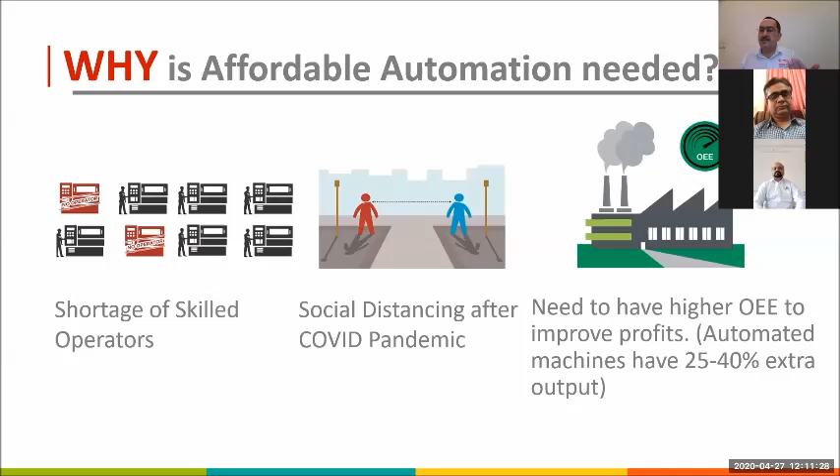Third thing, we have all suffered losses. All this shutdown, and when it opens also partial shutdown, huge loss. From where will we recover the loss? One of the ways of recovering this loss is by having a much higher utilization of the machines, which we call OEE, through automation. So if we implement this today, we start the process today, we will quickly recover our losses, and then we will make our companies strong so that we have higher profits generated over the medium term, long term. So because of these three reasons, affordable automation is absolutely the first priority today.

Now, when we talk about affordable automation without robots, what is the magic mantra? Actually, there is no magic. It is dependent on two basic principles. First principle is to design the in-feed system. In-feed means how the material comes to the machine. Design the in-feed system in such a manner that you do not need expensive equipment for that. So we rely on two things, gravity and vibrations. Wherever possible, use gravity. From a higher height to a lower height, gravity will bring the material. And use vibrations. I will explain now how we actually do it. So this is one principle.

Second is to design the CNC machine in such a manner that its own systems and its moving assemblies unload and load the machine without need for any gantry or robot. So these are two principles I will focus on today, material movement through gravity or vibration, and machine designed to load and unload itself, so you don't need any external systems. So, first principle.

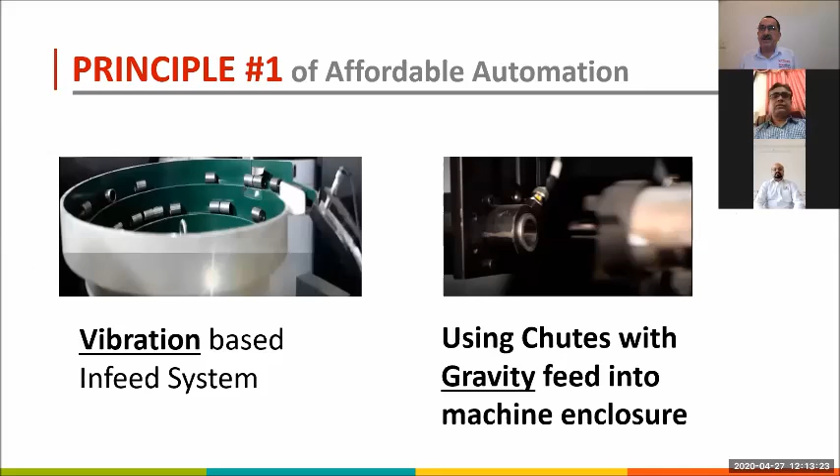In-feed. As you can see on the left side of the screen, this is a very cheap and very widely used system called a vibratory bowl feeder. This is a vibration-based system for small parts. You dump the material inside that, and with the help of vibration, it slowly moves the material to a chute from which it can enter. The second method is to design chutes, like a Z-shaped chute, where through gravity the parts keep coming down and then enter into the machine. So these are two of the common ways in which gravity or vibration is used for feeding the machine.

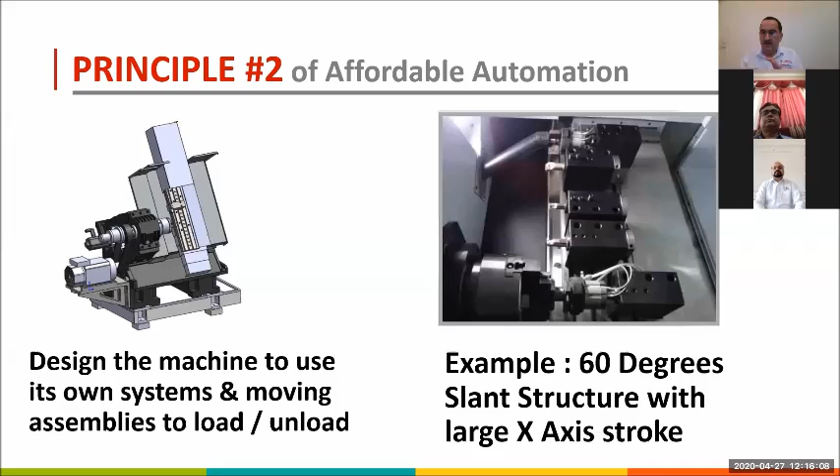So the format of this webinar is that we will show you something, explain certain concepts, and then show you a small clip which will visually demonstrate that. Here we will illustrate this principle of the machine loading itself with something called twin grip, twin release.

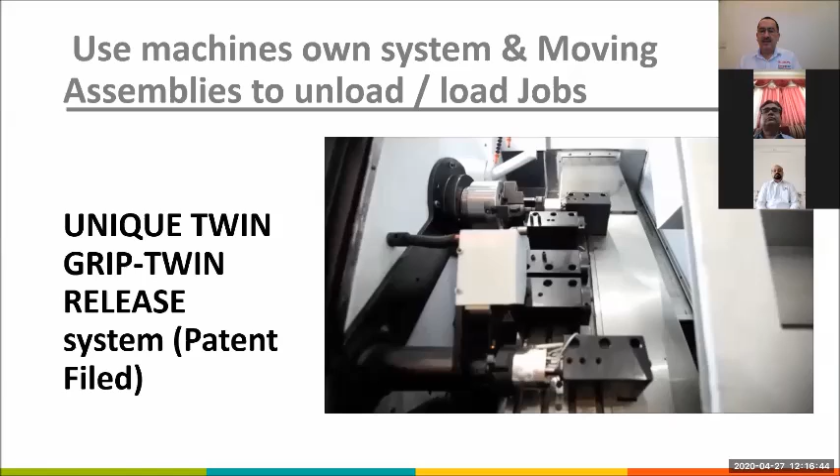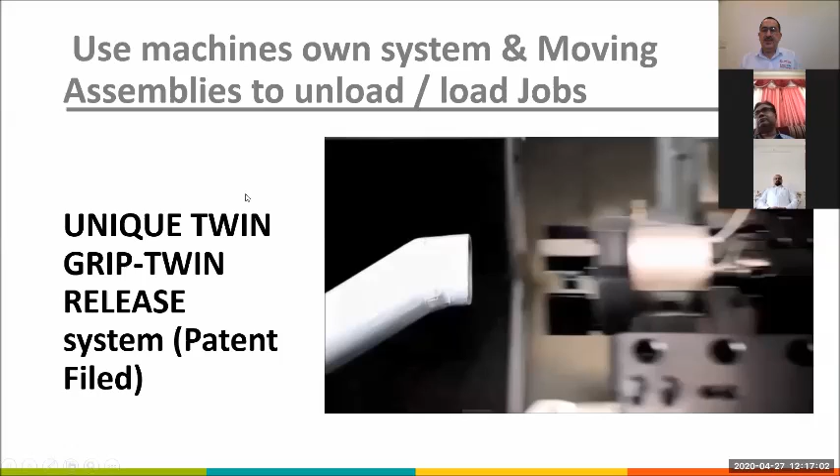So one gripper grips the fresh job, the other takes the machined job. I'll repeat this because this was very fast. The gripper which picks up the fresh job loads it into the work holding, and the one which has removed the job throws it into a chute. So, a very simple CNC-controlled mechanism mounted on the CNC machine itself. This is an example of using the machine's own structure and assemblies to load and unload.

Now, typically, these types of automations are for machines where you have two operations, operation 10 and operation 20, or at least one operation, operation 10. Now, once you have done the first operation, there are three possibilities. The first is that you exit the part through the chute, as we have shown here. And we saw in the previous video, the part is exited from the machine. Its job is over. But we have two other possibilities.

The second possibility is, in case of certain jobs where the second operation requires the face of the job to be turned. अगर पहले यहाँ पे मशीनिंग थी, पकड़ना यहीं से है, पहले यहाँ मशीनिंग थी, तो उसके बाद यहाँ करनी है. For that, we have a very simple technology called flip or flipping system, which I will show just now.

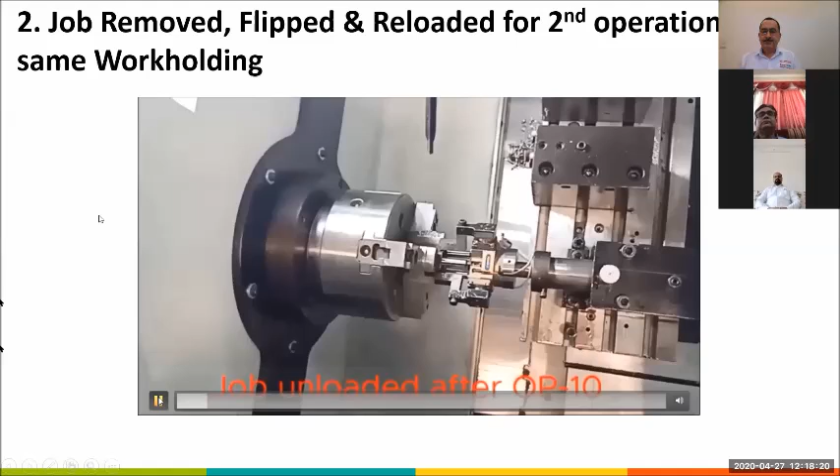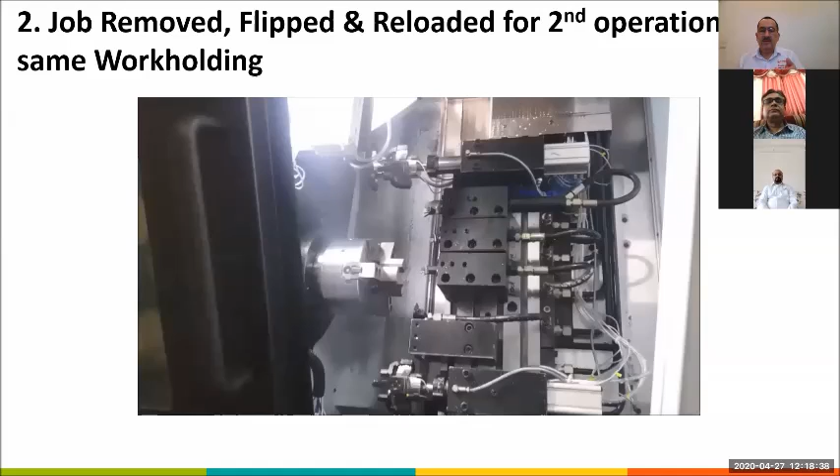So you see here, the job is removed. It goes to a flipping station. It's flipped 180 degrees. Again, it picks up, loads the job, and second side machining is done. You can see again that the machined job is taken to a flipping station. It rotates through 180 degrees. Again, the job is clamped by the gripper and loaded.

So this is for those jobs where the work holding is the same in both setups. Please note, where the work holding is the same in both setups, operation 10 and 20, you don't need to move the job to another spindle or another machine. On the same machine, on the same spindle, do one operation, do the flipping, and then do the machining of the second, and then the part can be exited. So this is a very cheap, effective way of completing a job in a single setup.

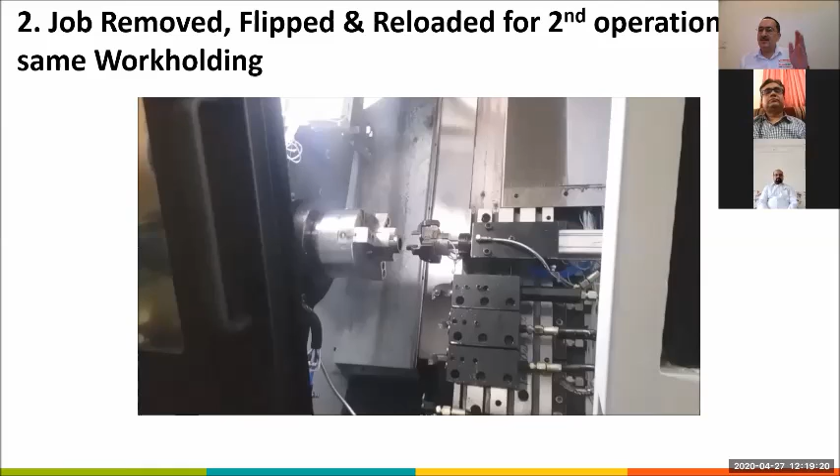Third option. In some cases, you cannot grip the job from the same diameter or from the same place for both operations. In many cases, in the first setup, you have to grip from the OD. In the second setup, you have to grip from the ID or something like that. Or there are multiple steps on the OD. So, alag-alag jagah se pakadne ka. In that case, you have to take the job to a second spindle.

Now, Marshal is a specialist in twin turn machines, twin spindle machines, inline spindles. So, inline means basically कि एक ही axis है उनका. So, in this case, what we do is, after the operation on one spindle, we have an internal transfer arm which transfers the job to the second spindle. And I will show you a video with this thing in action.

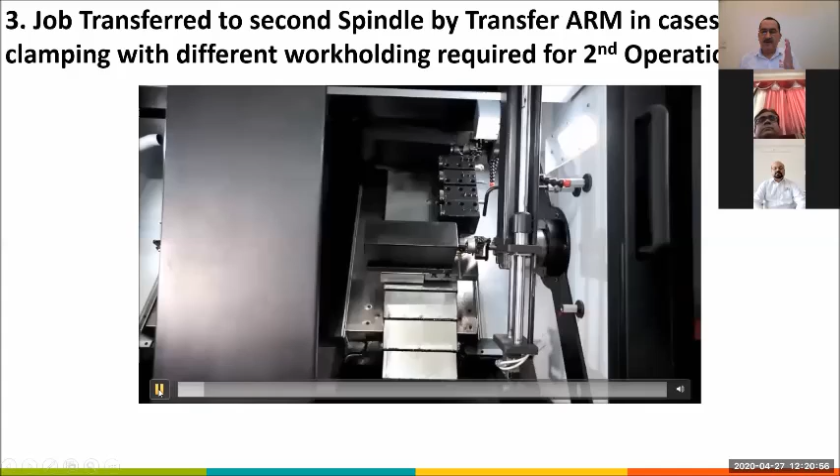So this is the transfer arm which you are seeing here. It catches the part and transfers it to the second spindle. And all this is within the machine. There's no external gantry, there is no robot. This is internal. So I will quickly show it again so that the principle is very clear. The job after the first operation is removed from the spindle, handed to the transfer arm, which takes it to the other spindle, where the other gripper takes it from the transfer arm and loads it in the second spindle.

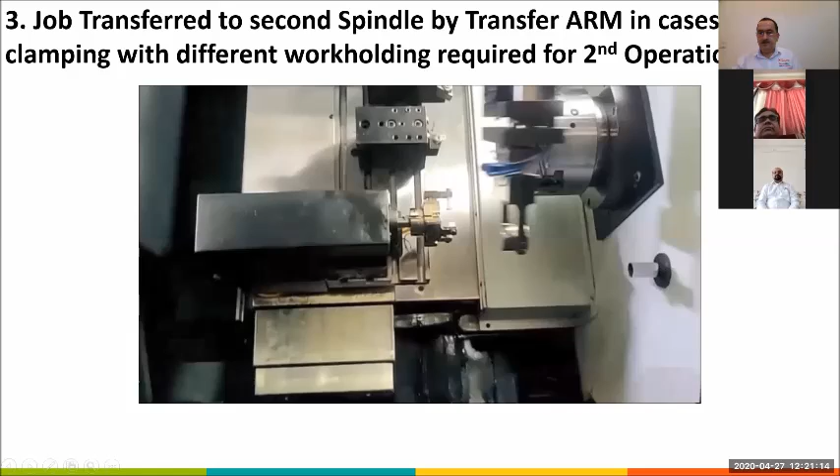So again, I'll repeat now that for most of the small chucking jobs, either the job is over after one setup, so it exits from the machine. In cases where the other side also has to be machined, there is one way, which is through flipping, where the holding diameter is the same for the first and the second setup. So you flip the job inside the machine and machine the second side. And the second case, where the work holding is different for both operations, there we use an inline twin spindle machine, and we use a transfer arm between them, as I just showed you.

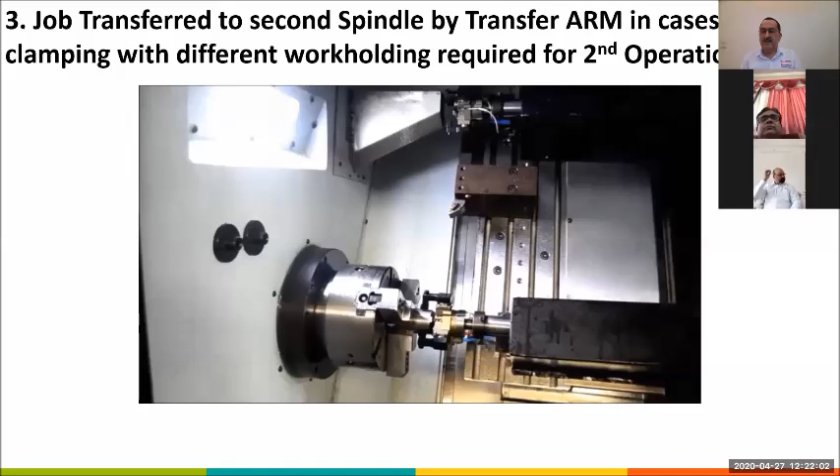Now, at this point, I'd like to clarify one thing. There is a very popular word in our country, jugaad. I strongly want to tell the attendees and anyone I meet, I say the same thing: जुगाड़ is not affordable automation. बहुत सा जुगाड़ जो होता है, it seems to work, but it has so many issues related to reliability that it is bound to fail, and then it discourages everybody, and then they say कि राम प्रसाद से ही काम करवा लो, ये तो बंद रहता है ज़्यादा, चलता कम है.

So reliability is the number one feature of automation. It has to be affordable, which means it should pay for itself within a year, preferably, and within 2 years maximum.

But please never compromise on reliability. In my view, in my 35 years experience, for machine tool automation there are 3 reliable systems. First is gantries, preferably the Japanese design gantries. Japanese design, what you find in Muratec or others, but the design is basically Japanese.

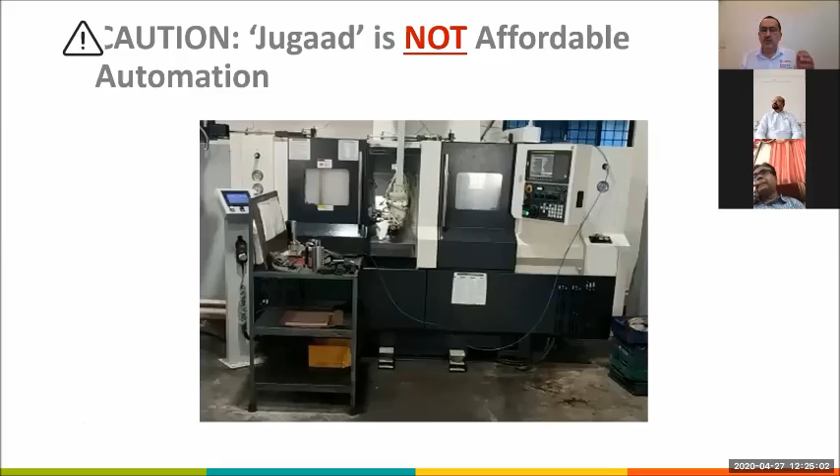Because I have seen lots of stories where machines are lying unused on the shop floor with lots of kuch chhat se jugaad laga, samne se laga hua, and so many moving parts. Even if they work, one accident takes place, all these alignments get disturbed, and then again it's a sad story. So don't use jugaad. So now, what are the types of solutions available?

Before we come to the solutions, I would like to hear from the 2 gentlemen who are representing you, the audience. Mr. Sharma, who is representing the very large customers, is Vice President of Endurance Group, and Mr. Vinod Madane, representing SME, has 4 units in various locations, including Nasik and Sanand. So, first of all, Mr. Sharma, a few words from you.

Yeah, Gauravji, I certainly agree with your viewpoint on jugaad. Of course, because these are very unstable systems which generally will face a lot of maintenance issues, and finally your OEE is going to go down. You had an ambition that you're going to save on the cost of loading, unloading, and maybe quality check and so on.

But what happens in the long run is that initially it will show you some results, but then you will have a lot of maintenance issues, because the design of automation with pneumatic or mechatronic systems needs enough experience and intelligence drawn into it to make a very reliable system with long-term benefit and service. But generally, in Indian industrial conditions, we fail on these kinds of things.

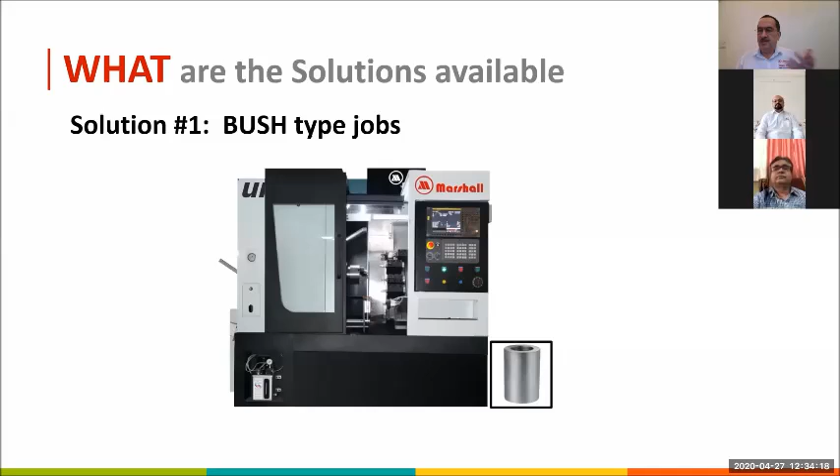Okay, so the first solution is for bush type jobs. A lot of jobs are bush type. They may not be bushes, but bush type means something which has an OD and an ID and a certain short length. So spacers can also come under bush type. So bush type jobs, as you can see in the photograph here.

So the way we have structured this whole presentation is that we show the photo of the component and a machine on which it is being made, and then we show a video clip, and then we stop and discuss it, because the video speaks best of all.

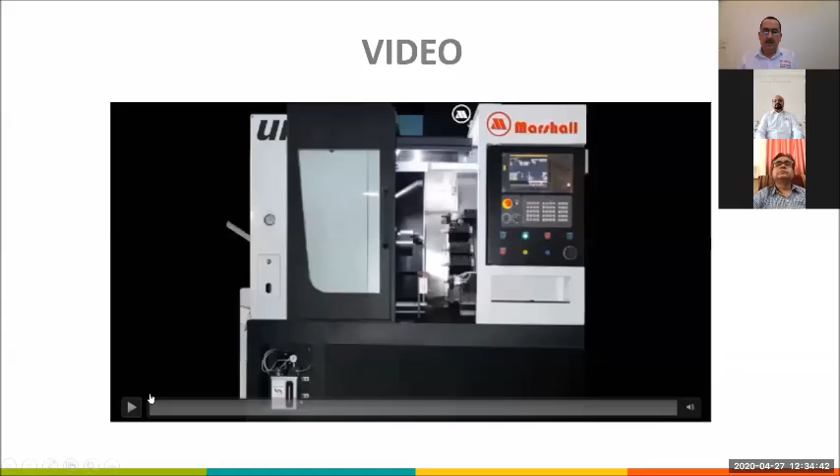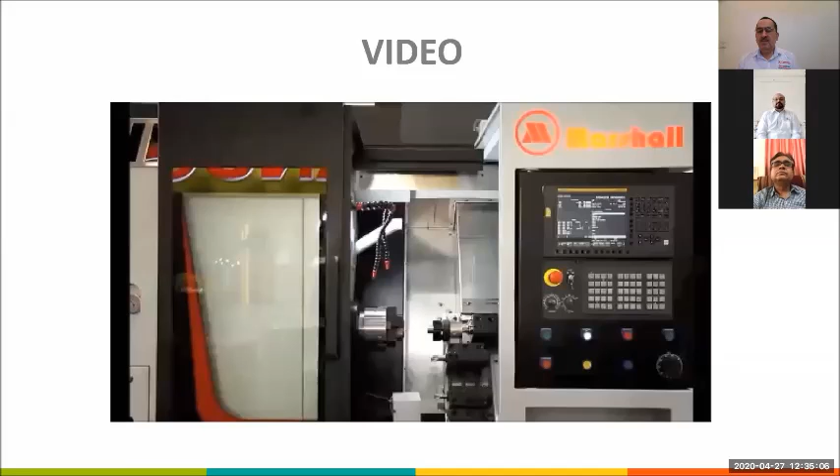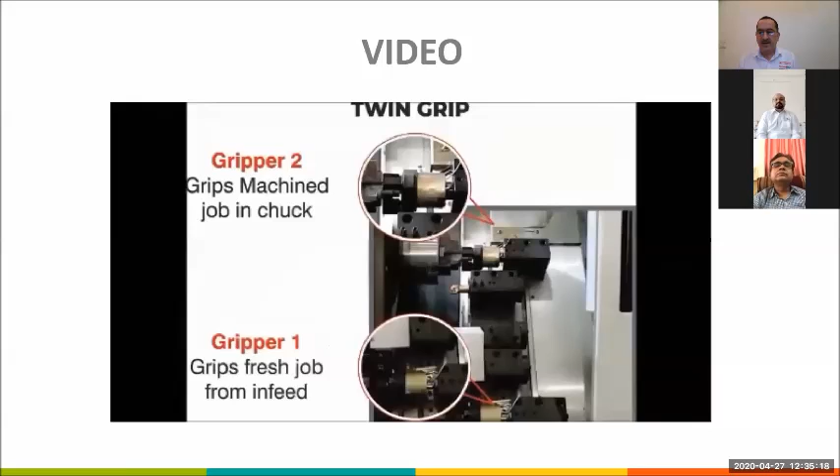So here we have two grippers on the slide, twin grip, twin release. One gripper takes the fresh job from the infeed and loads it into the chuck. The second removes the machined component and exits it. In this case, a vibratory bowl feeder is being used to load the job. In some cases it can be manually fed, but mostly it will be some kind of a vibratory bowl feeder. Once again, we are showing this twin grip, twin release mechanism using two grippers mounted on the slide of the machine.

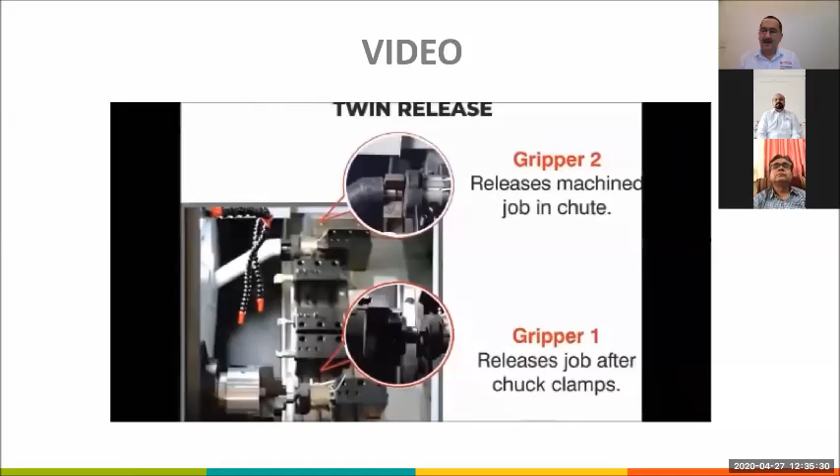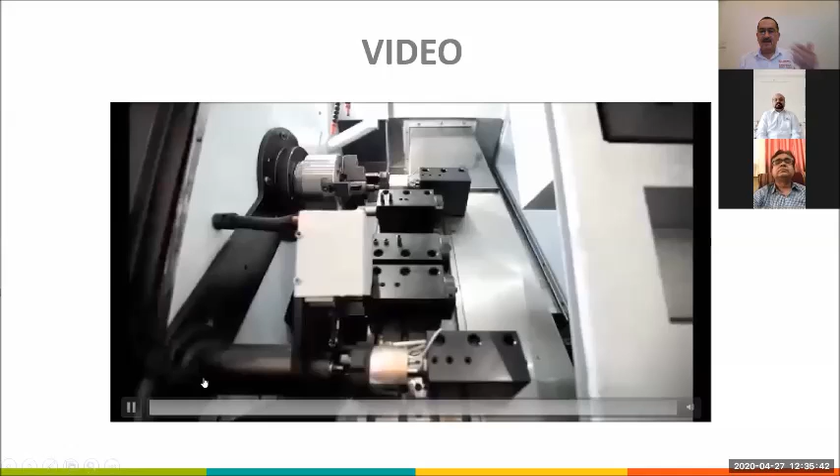So I hope this is very clear to everyone how this is happening. We have done it again and again so that everybody is clear that there is an in-feed system here, and then loading, and the upper gripper takes out the finished job and puts it in the chute. So this is the simplest kind of automation, cheapest, with very fast return on investment.

So the second solution, here we will show you two things. The first thing is that the job needs to be oriented, because this is a hex job. In the case of a round job, you do not need orientation of the work holding chuck in relation to the job, because it's round, it can be gripped anywhere. But a hex has 6 faces, 6 flats. So the 3 jaws of the chuck have to be oriented in such a way that each jaw touches a flat. You will see this in the next video.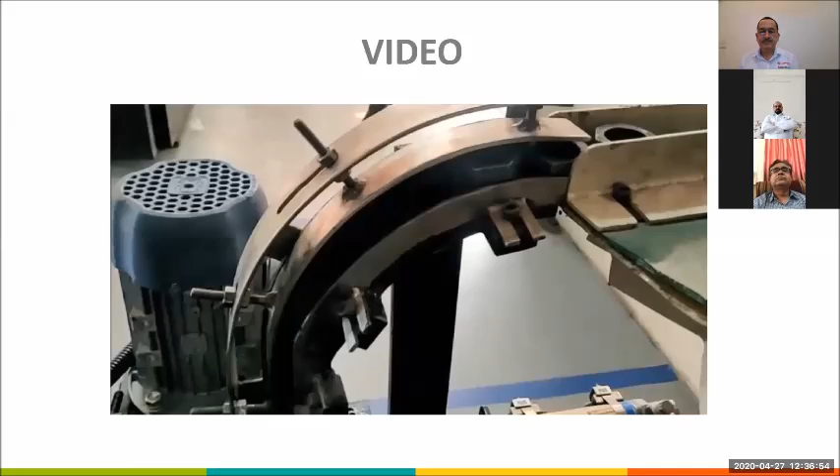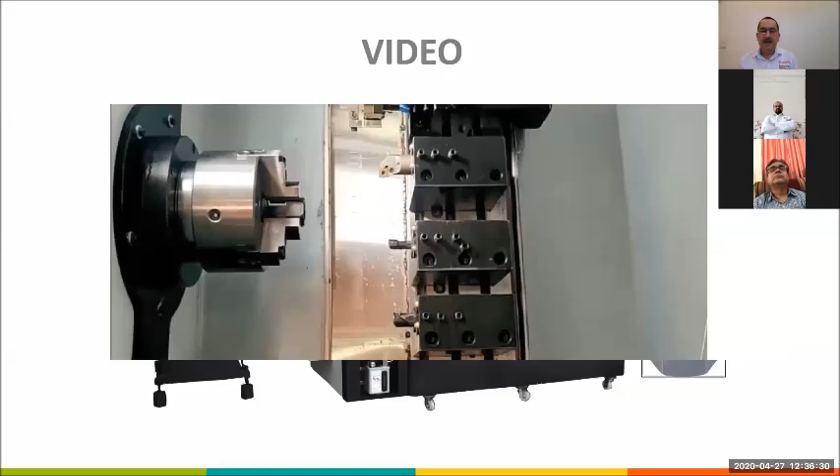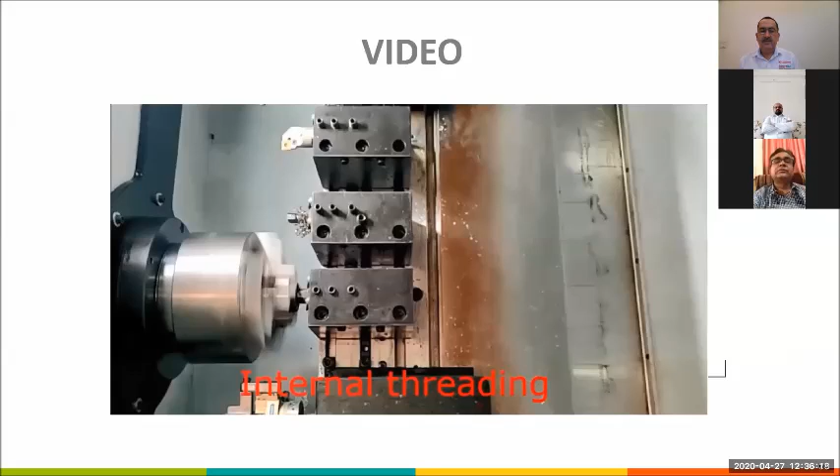So the jobs are already oriented here in the conveyor which takes them inside. And you see here the spindle is oriented to grip the job across the flats. These are the various machining operations going on. And then this job is going to be flipped. We have deliberately shown it in slow motion so that it is very clear to the viewers. So we have flipped the job, the second operation is also done, and then the job is put in an exit chute.

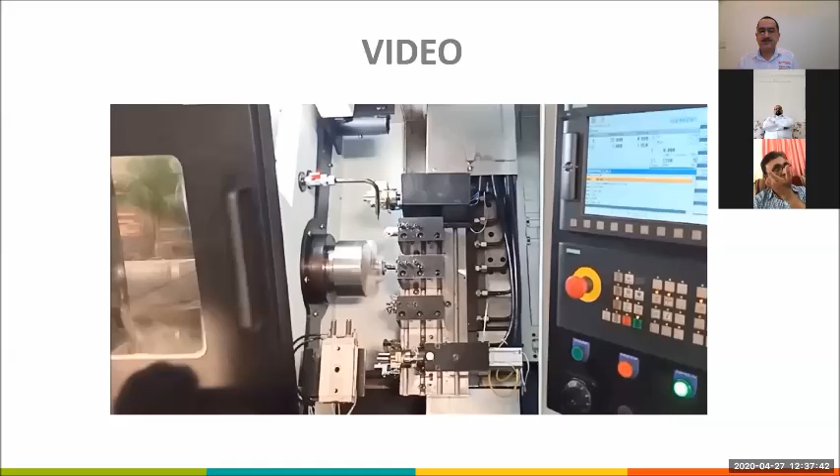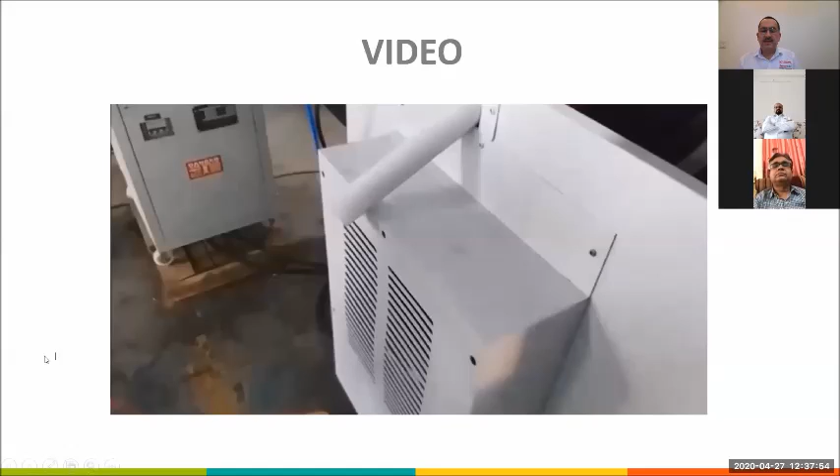So this is another example, and you can use this type of automation for various types of hydraulic connectors. Most hydraulic or pneumatic connectors have a hex and steps on both sides. You can also use it for any type of hex component, because typically when you use hex material, some part of that hex remains unmachined, which is why you are producing it from hex, and you have OD operations on both sides, including threading, or OD plus ID. So any such jobs you can do with this type of automation.

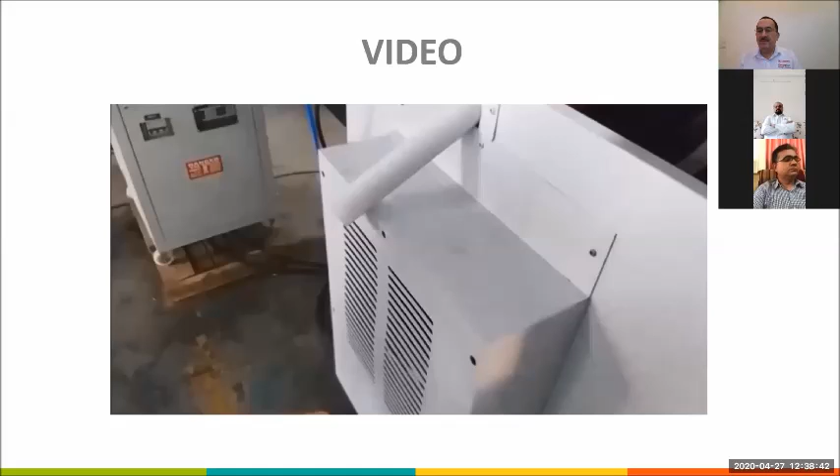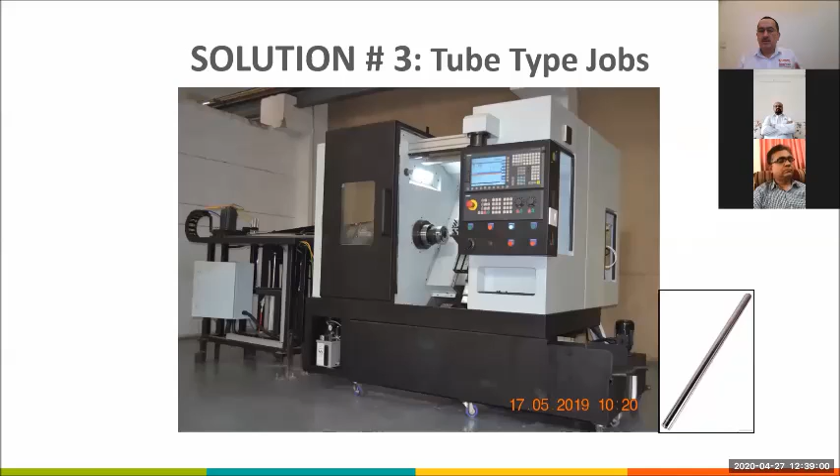Now we come to another class of job, tubular jobs. There are some tubes which need machining only at the ends, like the front fork, or any other kind of tubular job. So this is an example of auto loading for such a component.

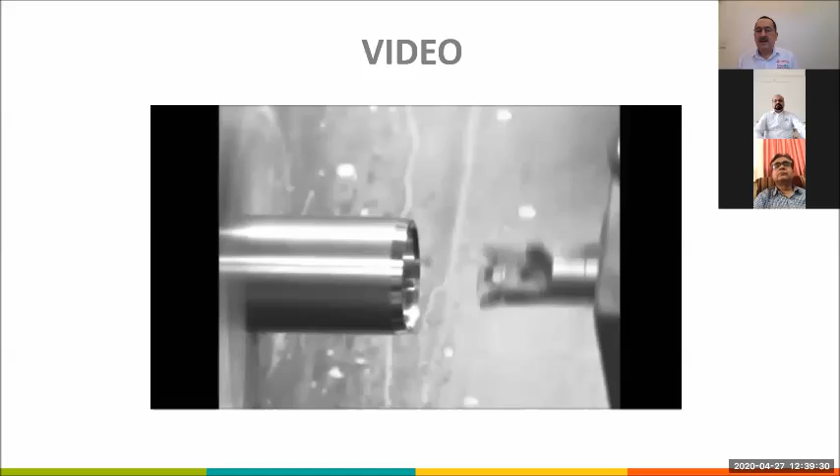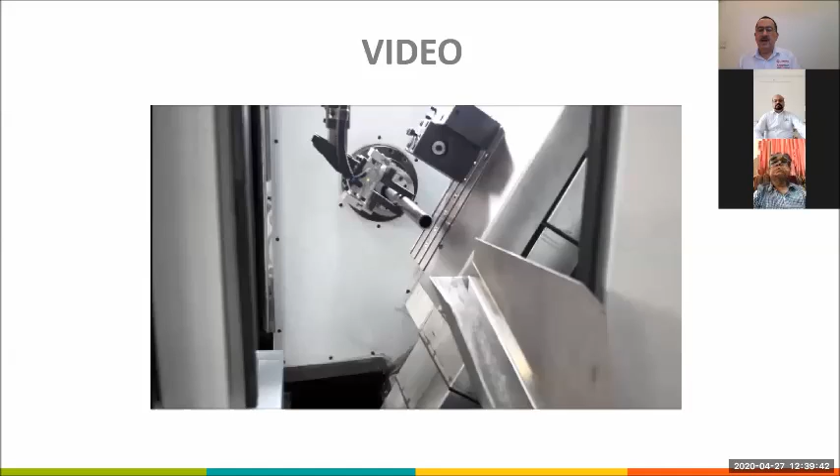So here we are using a very simple in-feed system for lifting the jobs to a certain height, and then they are pushed inside and machining is completed on one end. And then we have the servo pushing part of the tube out, and then an overhead arm takes out the job and removes it from the machine. So this is an example of machining of a tubular component.

So why we have shown this also, why this is important, is that the viewers should not feel that these automation solutions are only for small length jobs. These are also for longer, not just tubes, but longer shafts also, as we will show shortly. So this is a complete cell for longer shafts and multiple operations, including auto gauging.

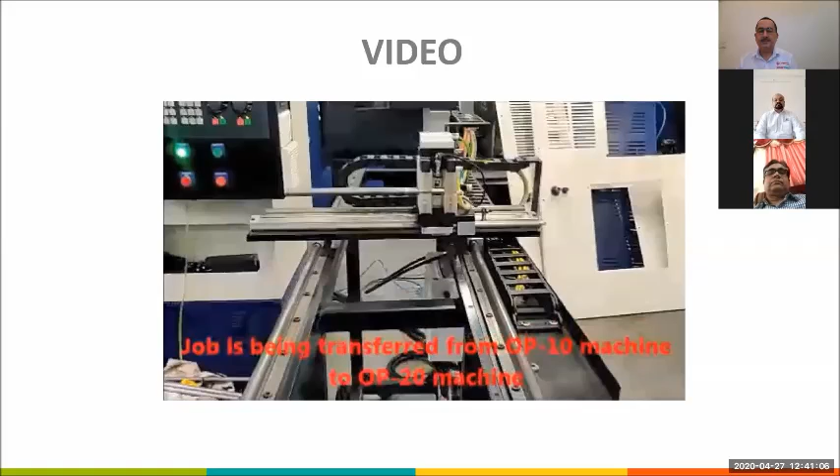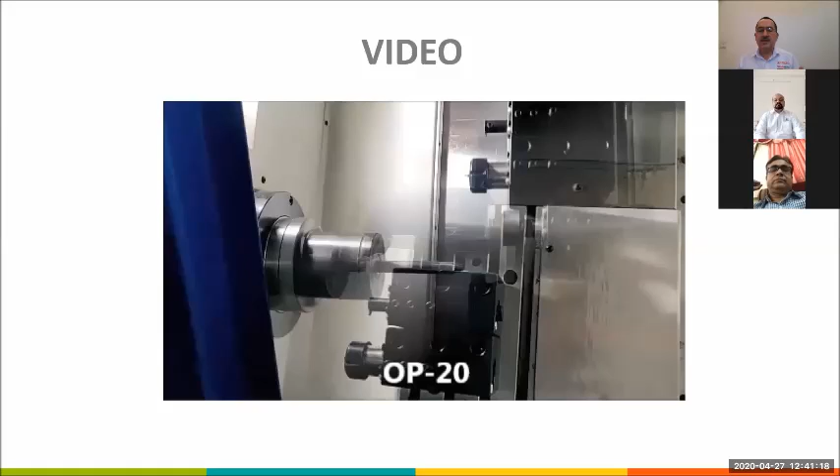So you see here, we have a system which transfers the job between the two machines where the two ends are being machined. And now you will see automatic inspection using the Smartcorrect gauging stations. So we have a series of such arms which transfer the job between various stations, including the auto gauging station, where the diameters are measured and the sizes are auto corrected as and when required.

Now we come to a cell where we have a gear and a shaft both being made. This is a very interesting example of a higher level of automation where a gear and a shaft, which form a set basically, and it's for export. And here the automation, the auto gauging and auto correction is also done through a gantry type system.

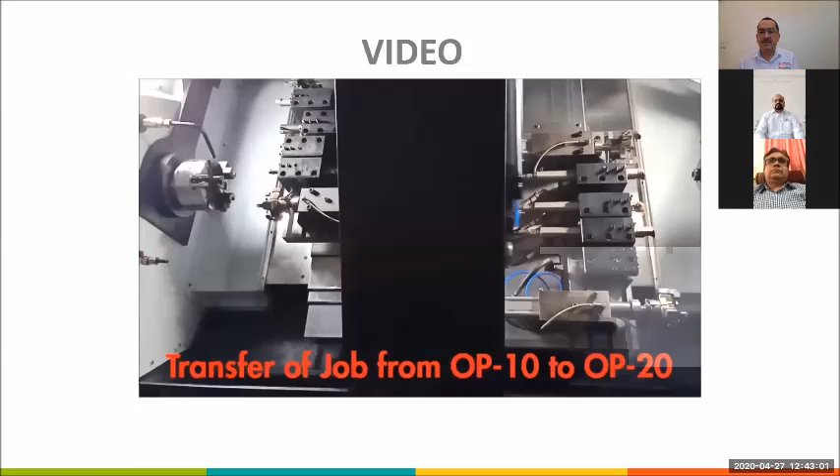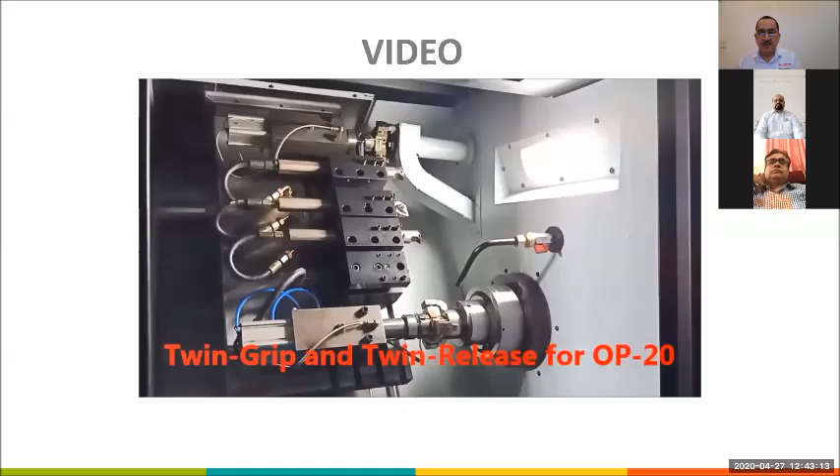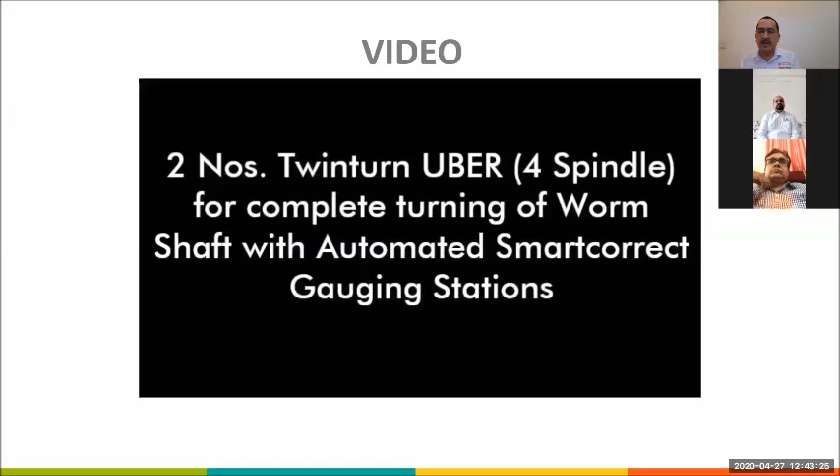Here you can see the transfer arm transferring the job between the two spindles. And once the part comes out, there is a gantry here for inspection. It picks up the part, takes it to the gauging station, removes the inspected part from the station. The part is inspected, size is auto corrected if required, and then it is put in a bin. So if the part is rejected, it is put in the red bin by this system. So just as you saw that gear, now the shaft is also being made on the same cell.

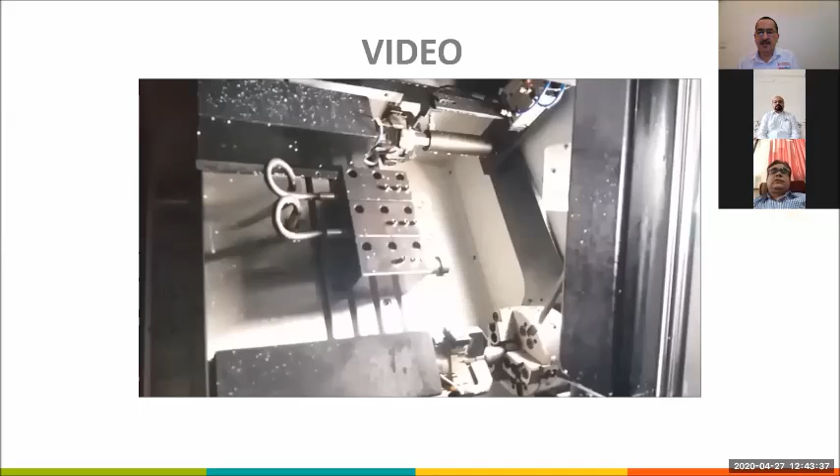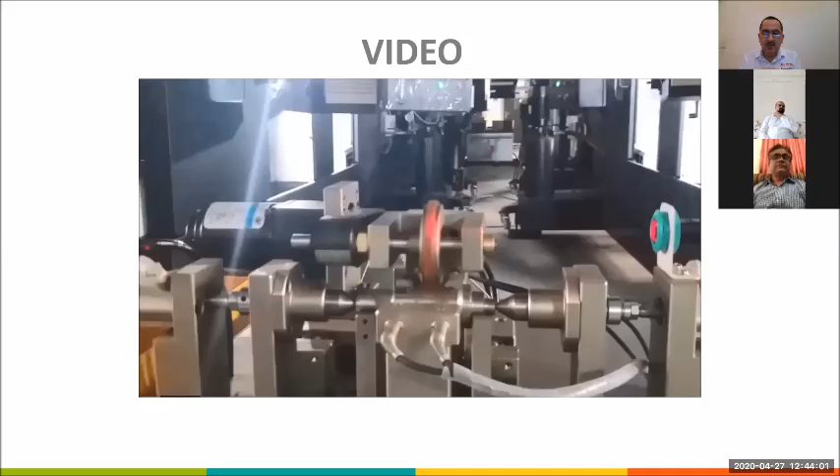One of the very important things in automation, affordable automation, is flexibility. So flexibility is now very much a part of how we design automated systems. See here, the inspection is being done automatically. The shaft is held between centers. It is being rotated so that apart from the diameters, the runout or the ovality of the job can also be checked. So this is an integrated cell. This is the next form of automation. This is the higher form of automation.

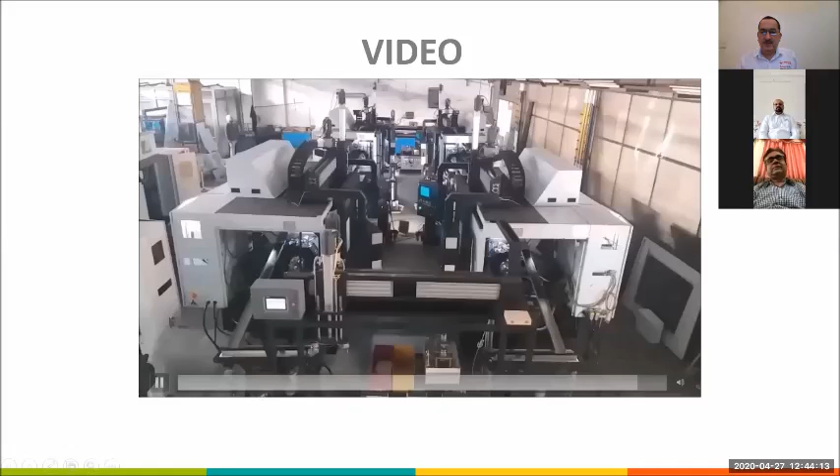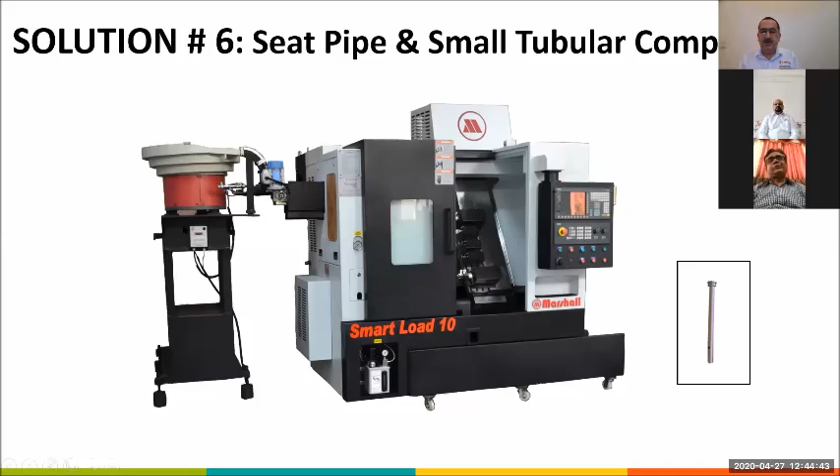So starting with very simple concepts, we have tried to show you some more sophisticated forms where you have a set of machines put together. Each of them is simple in their own ways with simple affordable automation, and then like a modular system or building blocks, you collect all this together and make a complete system. So again, we have this example of automation for small tubular components.

This component is a shocker part called seat pipe. This was considered very, very difficult to automate, even with robots, because it has to go inside the spindle. Please see how this is being done now. So we have this one gripper picking up a fresh job. And here you see a cylinder which pushes it back, so the gripper just inserts inside the spindle, and you have a pusher which pushes it against the stopper, because it is very important for length control that the job should rest properly against the stopper.

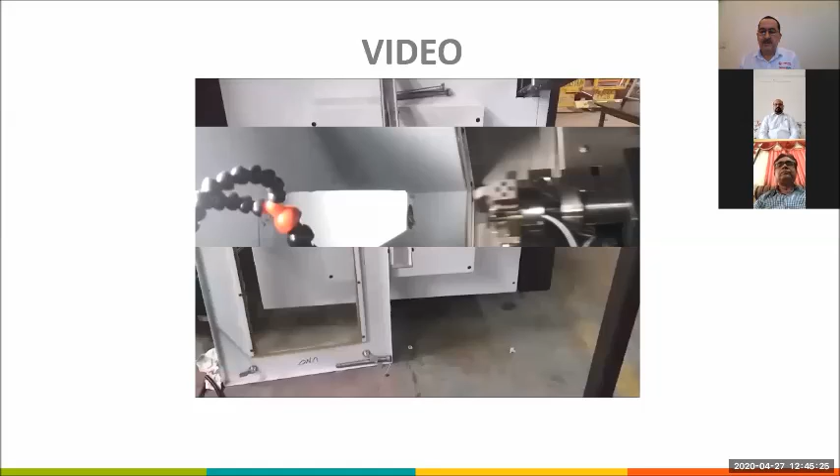This is one of the most challenging jobs that we faced. I will show this video again so that everybody is clear. And before I show that, I would like to again explain slightly that this is a very difficult job to load and unload, even if you have a robot, because of the nature of the job. It is slim on one side, and then it has a big head on one side, and it needs to be resting very well against the stopper at the back.

So if we try to use the gripper itself to push it, it would waste the time of the machine and it may not produce the desired results. So we use the pusher cylinder to push the job against the stop. And then we have an ejector cylinder inside, which also pushes out the job so that the gripper can grip it. Please watch it again.

Finally, we have now a solution where you can make components which require two setups, and these are roller type components, many of which are used as rollers for large size bearings, or in brake parts. It's called a pivot pin, which is used in a lot of drum brakes, and also things like piston pins. So there's a whole huge family of components which are roller or pin type in nature. So this kind of solution with a twin spindle machine with transfer between the two spindles is a perfect, affordable, automated solution for such parts.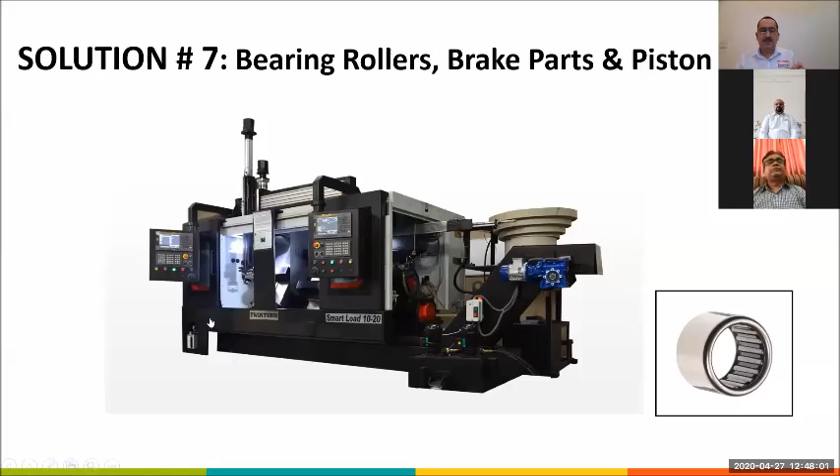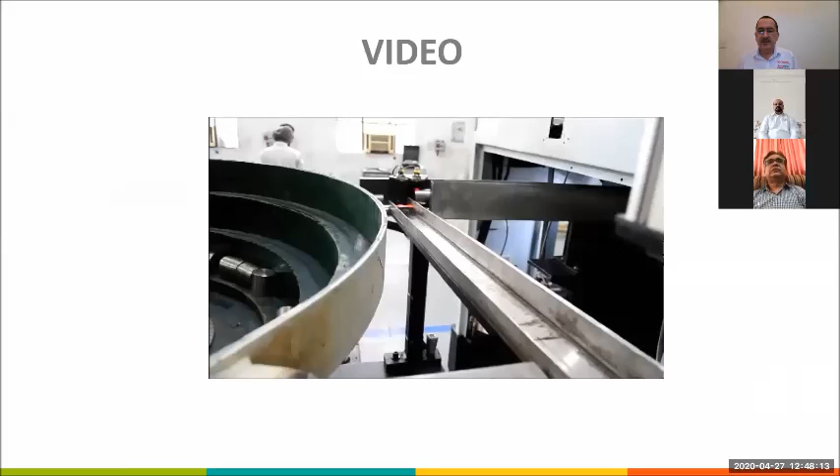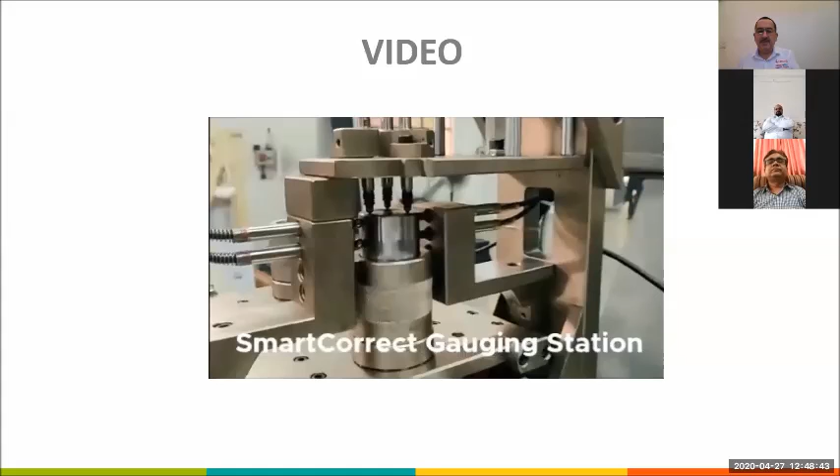Again, we have used a vibratory bowl feeder for infeeding the cut lengths. The raw material is cut bar lengths. So you have the first operation, and after that, the job is transferred to the second spindle with the help of the transfer arm. And the rest of the machining takes place here. And then the ready part comes out, where it goes on a gauging station, which is measuring the cylindricity as well as the total height and parallelism of the faces.

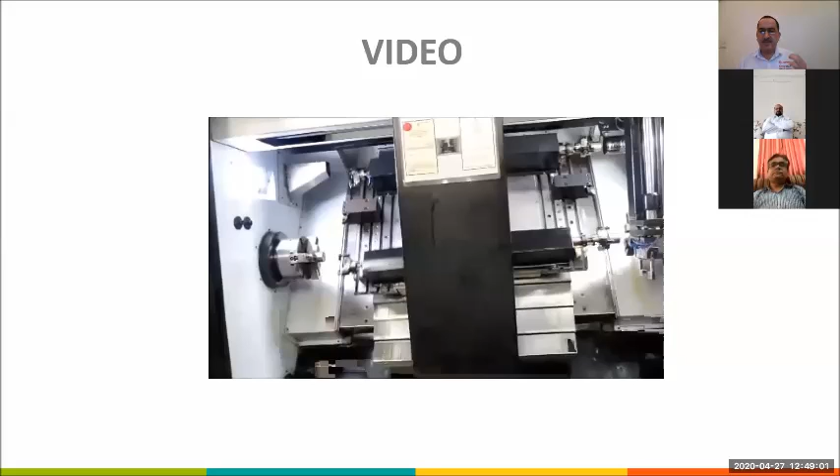So combining measurement with automation is again one of our strengths. And I think it is very, very important, because if you have measurement systems which combine with the automation systems, that truly gives you manless production. So you need very little intervention of people, and you produce parts in great volume, and also with great accuracy or quality.

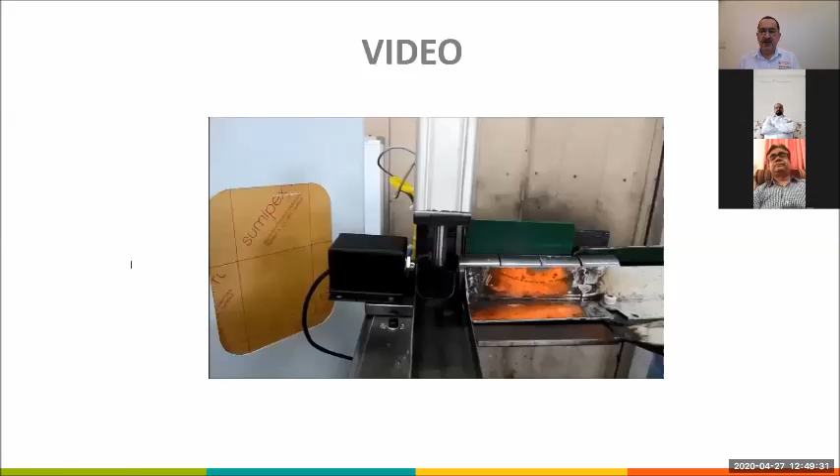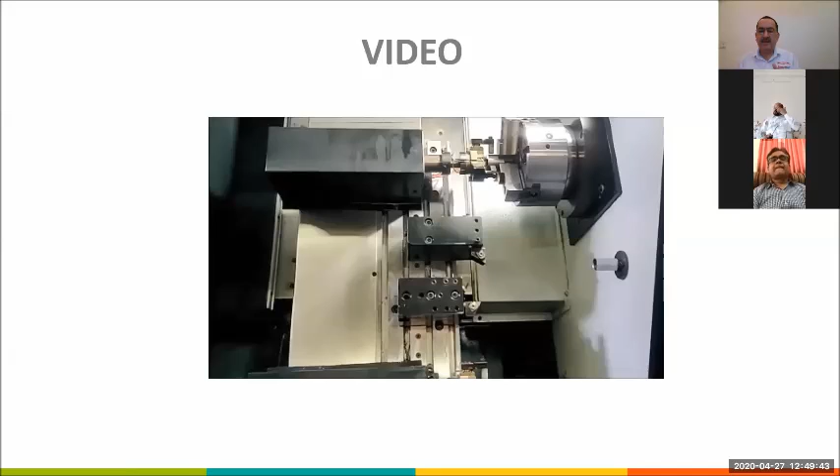I'll just go back to this last video once again, so that the whole concept becomes very clear. So, vibratory bowl feeder of cut lengths. Operation 10, or the first operation. And then after that, the transfer arm comes and transfers the job between the two spindles. And then the second operation, and the part is ejected, it comes out, and it's put on a gauging station. I will just pause here.

You see, this is a very, very important part: if you are producing in volume on these automated machines, it is very important that you have measuring systems attached to this automation, so that whatever gets made gets checked and auto corrected, so that you are producing 100% correct quality.

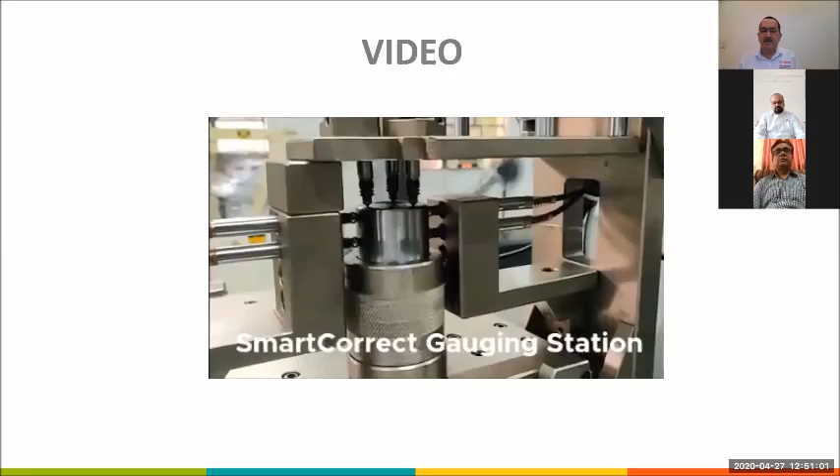Also, this system is a method in which you can do intelligent tool life management. It's another subject, so I'll not dwell too much on it, but I just want to tell you that this type of measurement system also leads to better tool life management, because you are able to predict when a tool's life is over. You replace it with a sister tool, and when the last sister tool is at the end of its life, the cell will automatically indicate to the supervisor or somebody that yes, my tools need to be changed. So this type of auto gauging is a very, very important part of automation.